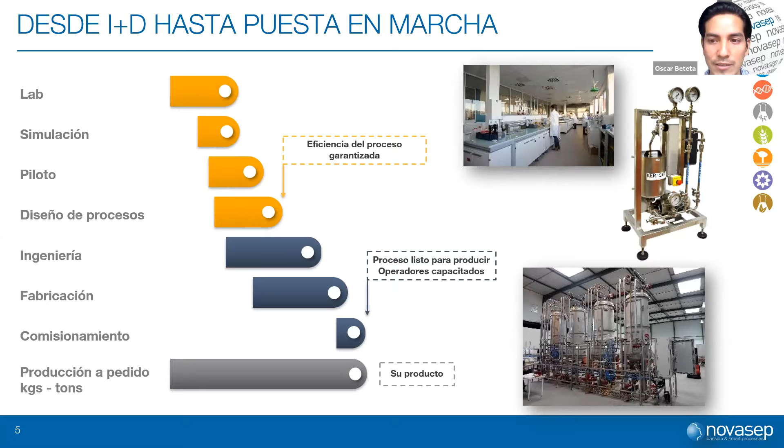We have to ask ourselves, why is softening important? The answer is actually very simple. The hardness, the presence of calcium, magnesium, and other minerals in the juice creates a problem because when the juice has this type of hardness and enters the evaporation and crystallization stage, there is a negative result in the operating part and in the commercial part of the plants.

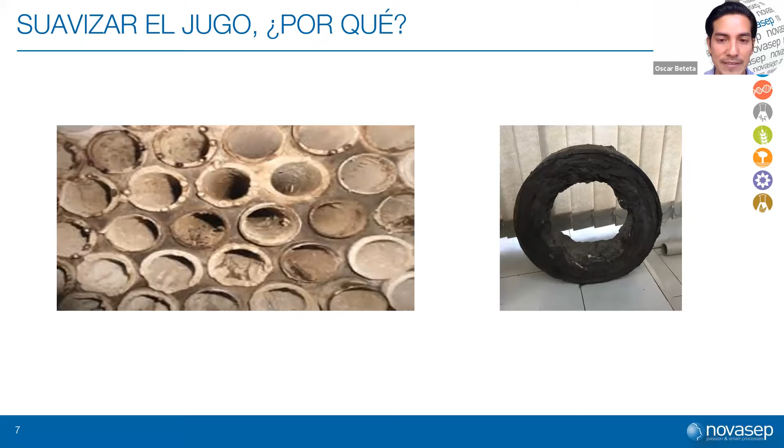So, now we will talk more specifically about this softening process as it has to do with the production of sugar from beets. My colleague Philippe, who Vicky introduced, will speak later in the second section about the sugarcane washing process.

But in general, what has to be understood is that we start with the raw material, which is the beet. Here are certain processes of storage, cleaning, cutting, and then we come to the clarification process, which is the important process to reduce the dissolved and suspended impurities in the juice.

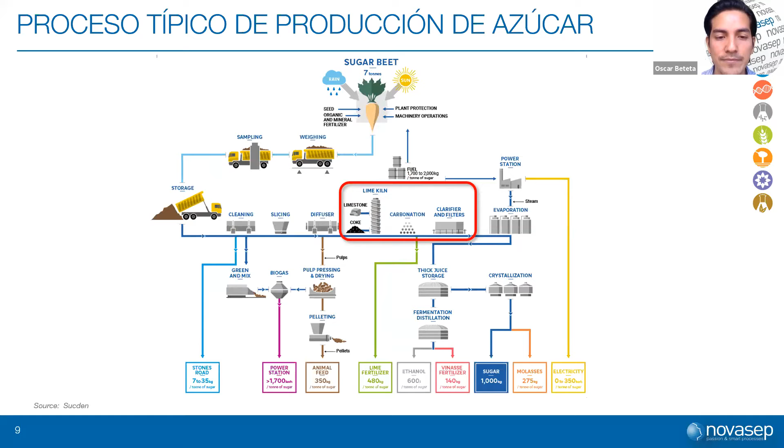Okay, let's go now into more detail with this liming and carbonation process, which together we call the clarification process. In the liming process, which we see here in this diagram in English, those are the stages where calcium oxide is introduced. In English, it is called limer. Calcium oxide is added, which becomes calcium hydroxide when it is mixed with the juice. This process increases the pH.

Then we have the carbonation stage that occurs in two steps. The first step, then the second step. And in this step, carbon dioxide is introduced to reduce the pH and to induce the precipitation of calcium carbonate. These combined steps are part of the purification process, or what we call clarification, which today is the most effective and less costly that is used in these types of plants for the production of sugar based on beets.

As we talked about earlier, the process of carbonation is divided into two steps. In the first step, the objective is that the juice has a pH higher than 11 and to keep the temperature at 20 degrees Celsius. And the ultimate goal of this step is to remove many impurities, including invert sugars, colloids, pectins, organic acids, color.

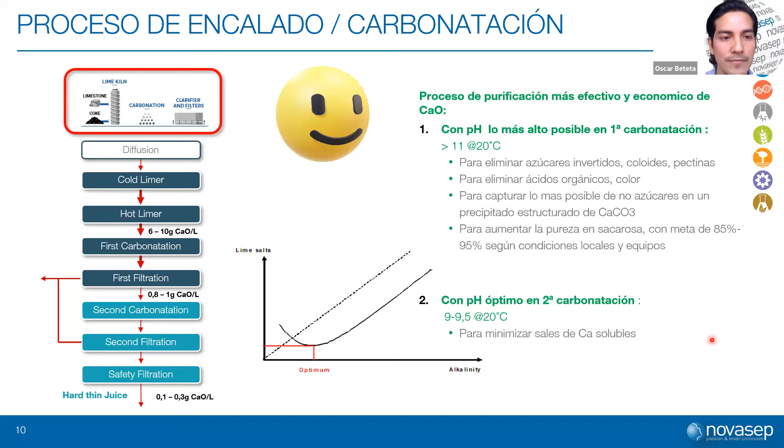Well, okay, those are the advantages, what we saw here. Now we are going to talk about the downsides. What are the downsides of this liming and carbonation process? What I want to highlight first is that we introduce calcium in this liming process and we can see the calcium levels in the different parts of the process. We start with 10 grams, then we lower it to a gram after filtration, and then in the second carbonation step, we still have residual calcium.

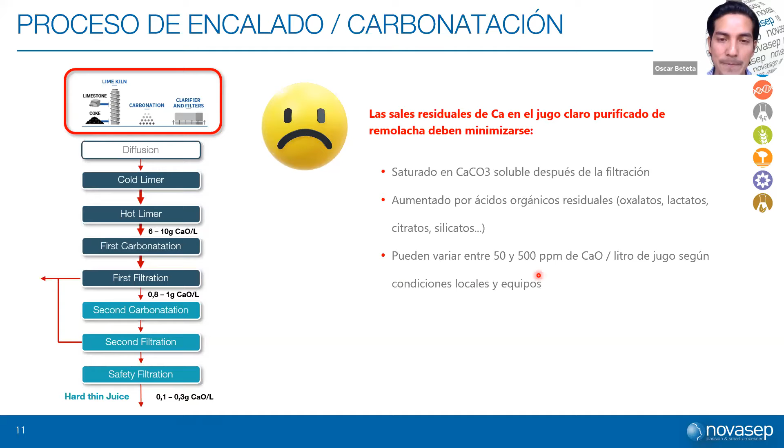What is the impact of this residual calcium? Okay, the impact is that now we have a clear juice, but we have a hard juice, a juice with hardness. More or less, this concentration of calcium can be from 50 to 500 ppm of calcium per liter in the juice. And when we have this type of hardness, obviously we are going to have incrustation problems later in the process, in the evaporation stage. If these calcium salts are not controlled, they precipitate during evaporation and the incrustation phenomenon is formed.

This is the result in reality when you have incrustation and mineral deposits in the crystallization and evaporation equipment. The equipment will not work 100% efficiently, and more water vapor will be consumed in the plant. Additionally, what are other impacts of these calcium residues?

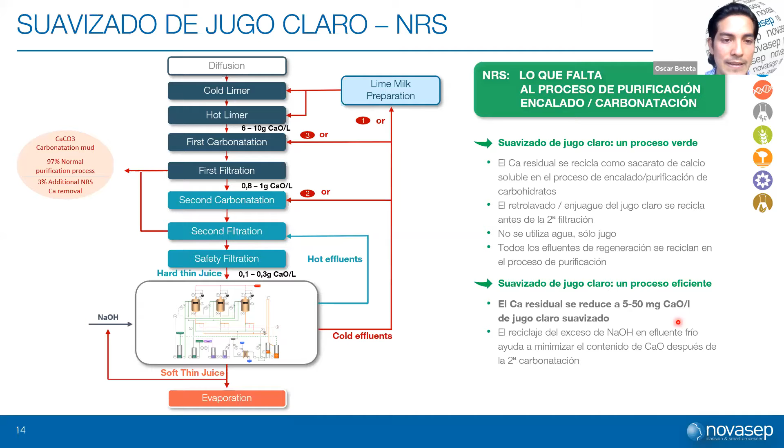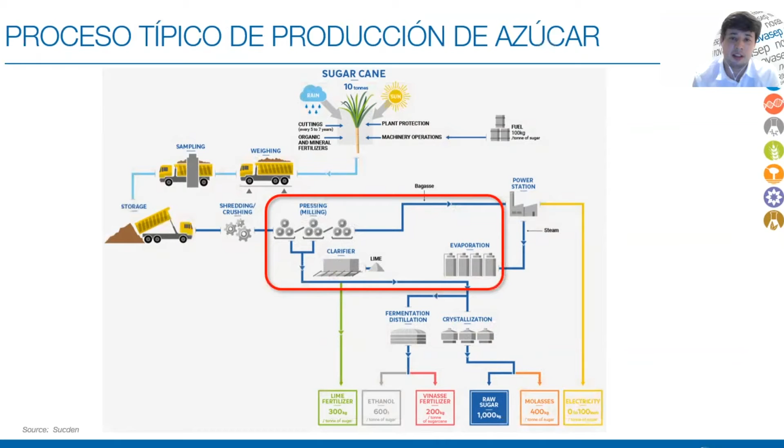As a result, too much evaporation and more steam is required to maintain performance, and several shutdowns are required for periodic maintenance when steam consumption can no longer compensate for performance losses. Thus, in some places in Latin America where we have very high hardness measures, it is often necessary to make several stops a day.

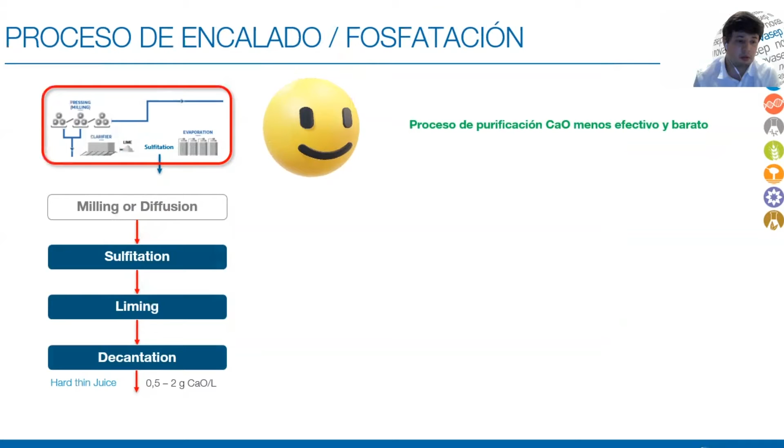Well, if we look more closely at the purification stage and compare it to the beet process, we notice some important differences. In sugarcane, the liming process and the phosphating process are generally used rather than carbonation. This process is cheaper, but it is a less effective process. Thus, we can have sucrose purity in the juice of 83 to 90%, depending on local conditions.

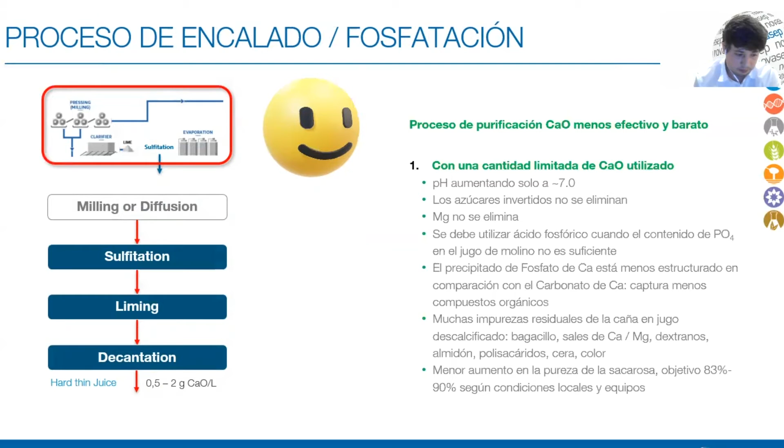And also, this cane juice has more impurities present, mainly due to the presence of bagasse, calcium and magnesium salts, dextrans, starch, also polysaccharides, wax, and coloring agents. So, when we work with cane sugar refining without carbonation, it is not possible to remove the magnesium salts, and also the precipitation yields in this case are lower. We have a higher residual hardness content, and the calcium content can vary between 500 and 2000 ppm, and the magnesium content can vary between 200 and 550 ppm.

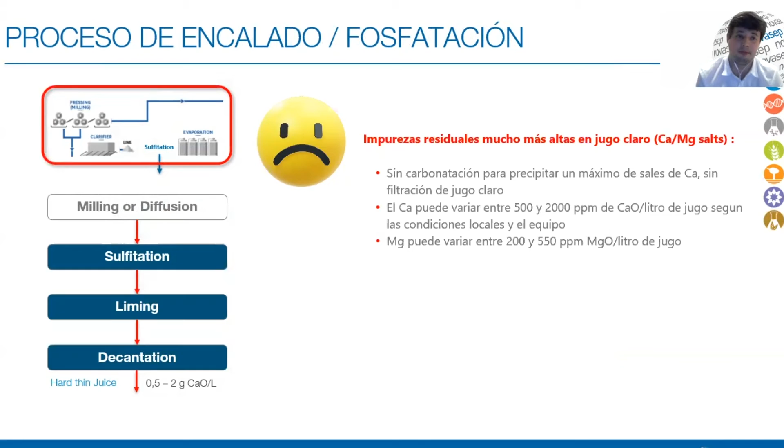Here, for the production process of cane and beet, it is important to note that cane harvests are 2 to 3 times longer compared to beet, and due to the clarification process used, you always see a lot more calcium and magnesium salts in cane. So in cane it is necessary to increase the frequency of cleaning of the evaporators, and as a consequence, operating costs increase due to the higher consumption of chemical products and energy.

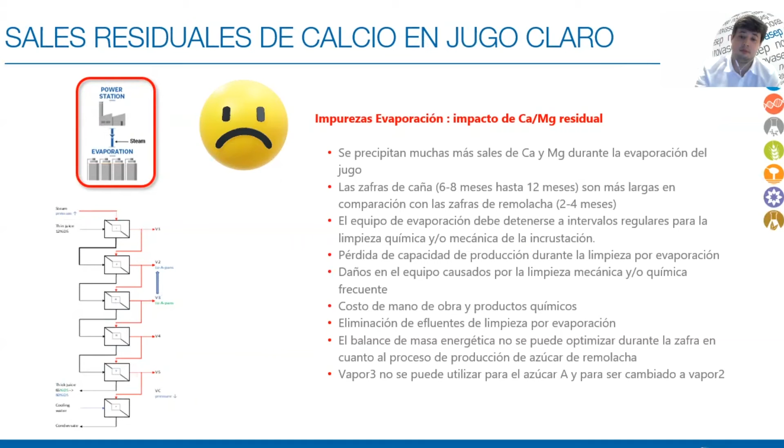We can also note that the impact of these differences on crystallization is that raw sugar is generally produced in cane with a higher color and low purity, and many times a sulfitation stage is used to compensate for that higher color. Sulfitation is used to remove the color from raw sugar, but it is important to be careful because this process can lead to an excessive amount of sulfites in raw sugar.

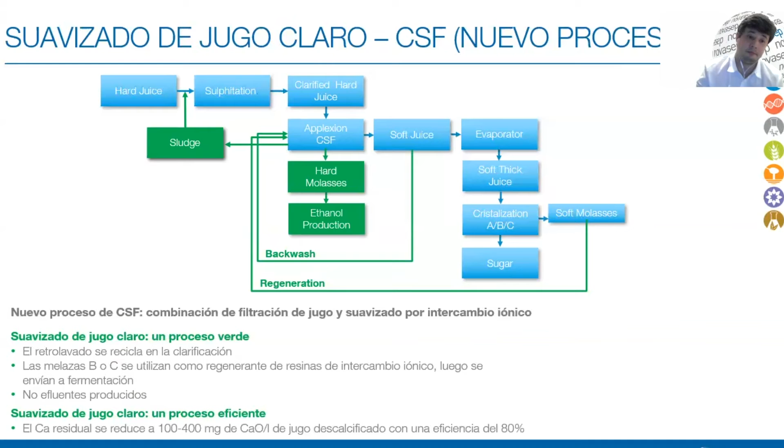Now, I would like to show you a case study that we did for one of those pilot tests. It was a plant with a capacity of 2,000 tons of cane per day and a high residual hardness of 1,400 ppm. In the pilot tests, it was possible to have a very efficient reduction in hardness. The hardness of the softened juice was less than 276 milligrams of calcium.

From this data, it was possible to dimension the industrial level, and with this, we simulated what the operating costs would be for that plant. The most significant cost was the replacement of the resin, which had to be changed every harvest or every two harvests, depending on the local conditions. We also did a study of what the benefits would be with this technology.

So we can see economic benefits that we have with the reduction of the energy costs of the plant. We also have a reduction margin in the number of cleanings. So we have less chemical consumption for the generated effluents. There was also less effluent generated for cleaning evaporators.

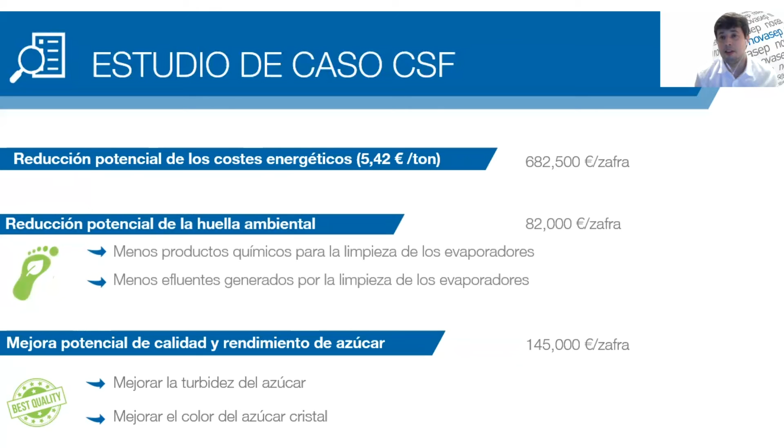In order to use this technology, it is very important to have a good interaction of this technology with the customer process. So for each factory that has its own configuration and characteristics, a detailed study of each case must be carried out. Now, let's talk a little about what would be those factors that impact and influence the return on investment time for the installation of a system like this system.

The first factor that we consider would be the calcium residue that is in the clear juice, because depending on the hardness, it will directly impact the system that we must design for your side for the mill. So the greater the hardness, the greater the system, greater amount of resins needed. So it is an important factor.

Another important factor is the time that the harvest lasts. Generally, what we see is that the longer harvests have a shorter return on investment because they have benefits for a longer time during a year.

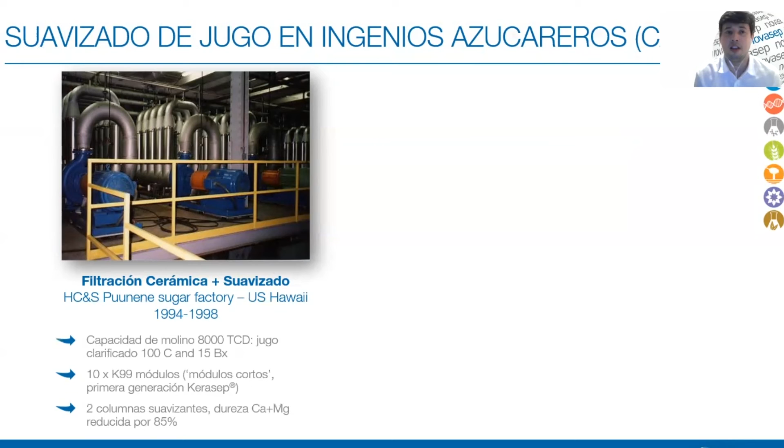Now the second reference that I am going to show you is a reference that we have developed in recent years, with some pilot tests that we did in Brazil and Guatemala. Here we could challenge our system against juices with very high hardness, and it was also very efficient.

But in order to optimize the implementation of the system, we changed the ceramic filtration systems for a frontal filtration system that proved very efficient also for removal of impurities in the juice. So we also had the reduction of the turbidity of the sugar. We also had reduction of starch, and it was possible to see that the sugar produced was of superior quality

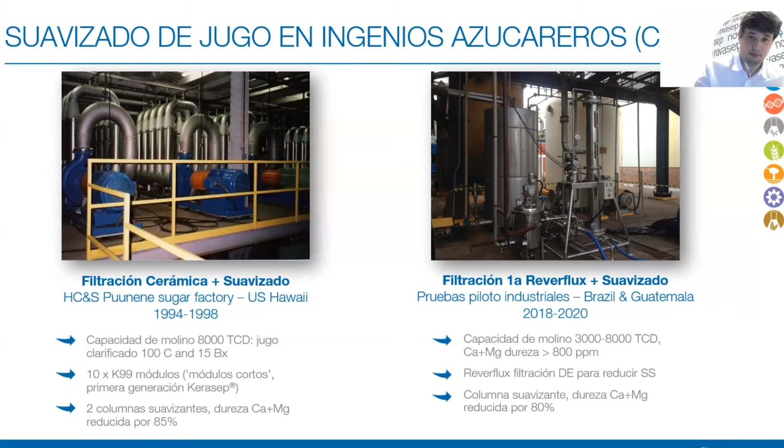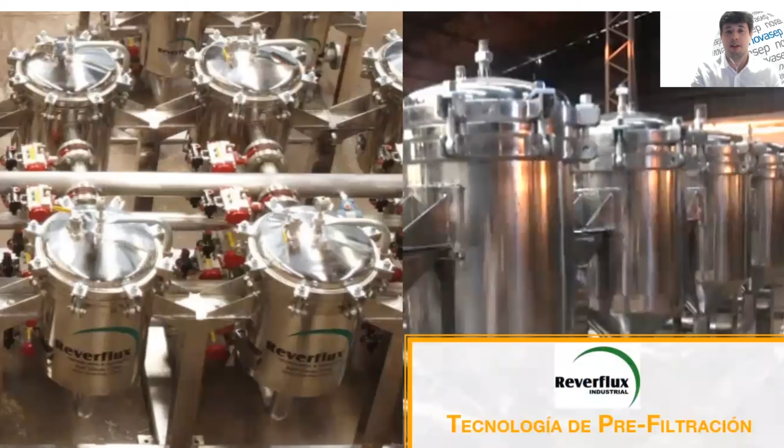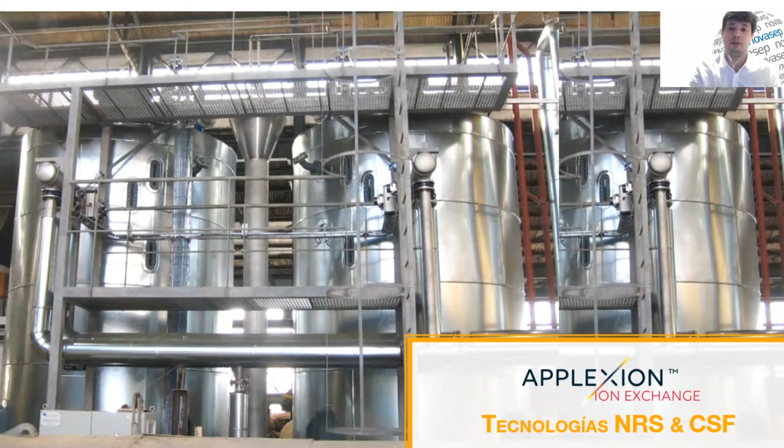as well. But here we only have pilot tests. We do not have a system installed on an industrial scale. It is hardly on a semi-industrial scale. Here we now have a photo that I want to show you of what an industrial scale ceramic filtration system would look like. Here I also want to show you the whole system of a frontal filtration system on an industrial scale. We also have that system, and finally a photo of an industrial scale ion exchange system that can be used for both beets and sugar cane.